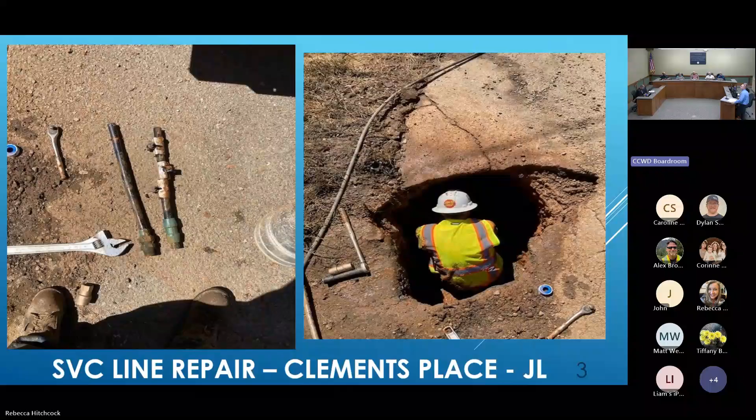So the guys, when they find stuff like this, they just go ahead and replace that section. You can see what they cut out in the image on the left. They actually cut out at the tap too - it was leaking at the tap. So they put a whole new tap saddle on and then ran a new section of poly tube.

So that's what a new tap saddle looks like - you can see it on the main, the AC main there at the top of the screen. And this is kind of what the old tap looked like - it's just threaded right into that old AC pipe. A lot of the time the threads, and any of the epoxy around the threads, will break.

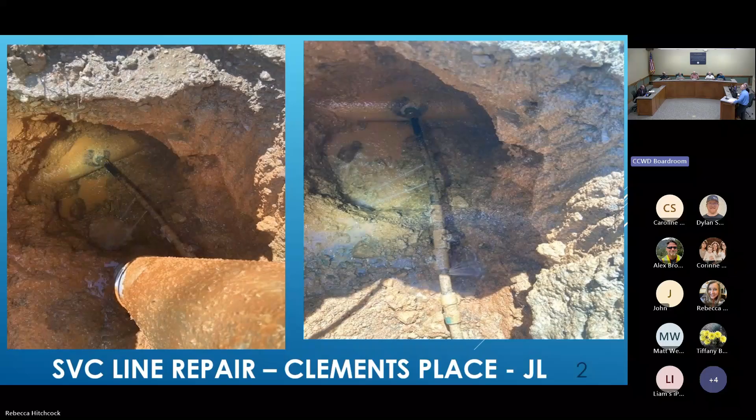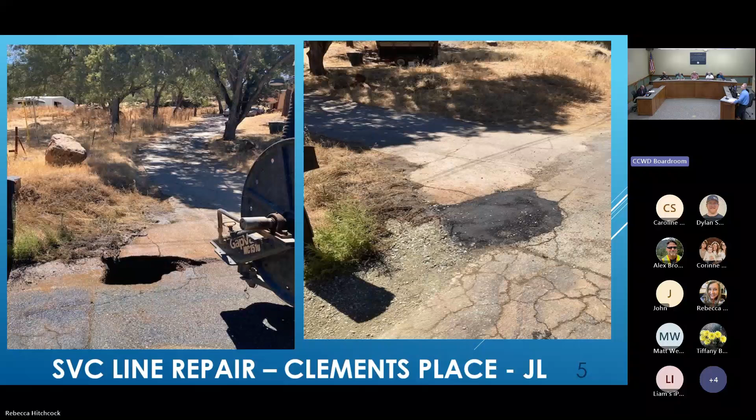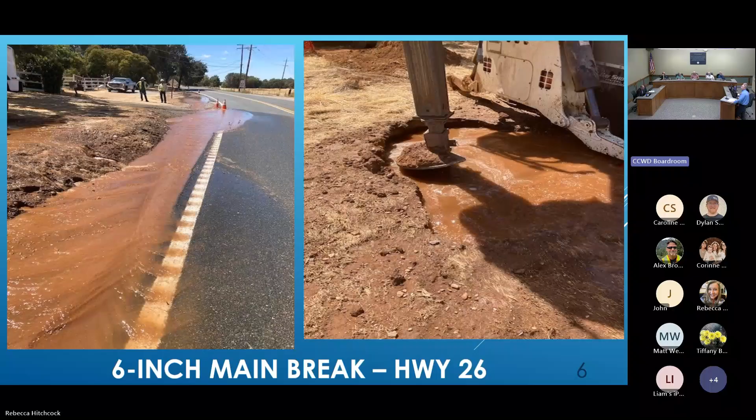This was a USA related to PG&E setting power poles off of Highway 26. Not a lot of water, but there's some. So this auger bit bored into our 6-inch water main. The challenge here is, when our folks respond, not to just completely shut that off and allow all that muddy water to flow back into the system.

You really want to keep positive pressure until you can clean and expose the area and then get in there and make a repair. So do you shut the water down a little bit? Yeah - so the hole where they bore, you just have that kind of boiling out.

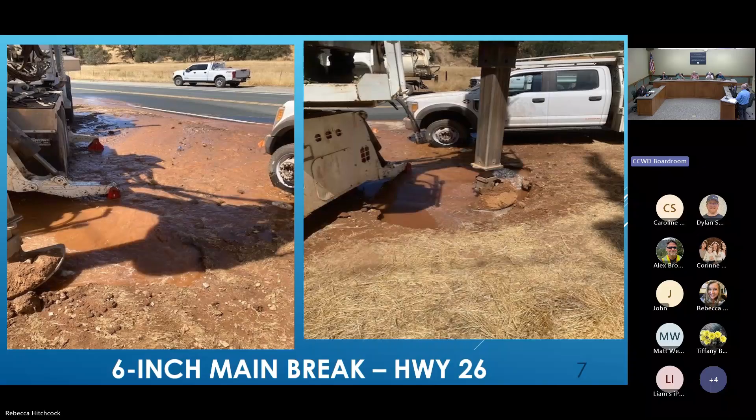So why would they be drilling anywhere near it? We've got good maps, they've got metal detection... We don't have good maps. Yeah, we don't. That's the challenge - it all depends on the location. It could be the map, it could be a locate bust. This pipe can be very difficult to locate.

This is asbestos cement - if it doesn't have a wire on it... Was that one of the 400 USA finds that we did? That would be, so I believe this is one. I'm not sure if this was a USA locate bust on our end, but there's a lot of back and forth between PG&E and the utilities.

If we mismark and tell them there's nothing right there, go ahead and dig, and they hit it, it's on us to repair it. If we mark it and they hit it anyway, then it's on them - so there's a little bit of back and forth that goes on there. PG&E usually has a minder on the job to help account for this work, and the ops folks here are up to speed on what happens. But there's so much work going on that invariably CCWD comes out ahead at the end of the month.

But at the end of the day, can you still see those marks? It depends, unless they took the asphalt out and it's just gone. Some of those USAs are what we call remarks, where we need them to come back because we've done a bunch of work and now we don't know where anything is anymore. Can you come back and mark it again? So that'll happen.

Damon, I have a question. You call that a concrete pipe, is that what most people would refer to as transite? Yeah, I believe AC, some folks call that transite. But how widespread is that material used? I'd say about 75-80% of our systems are this pipe, AC transite, throughout the county. The rest, about 20 to 25%, would be C900 plastic, PVC, ductile iron, some steel, though not a lot of that left anymore.

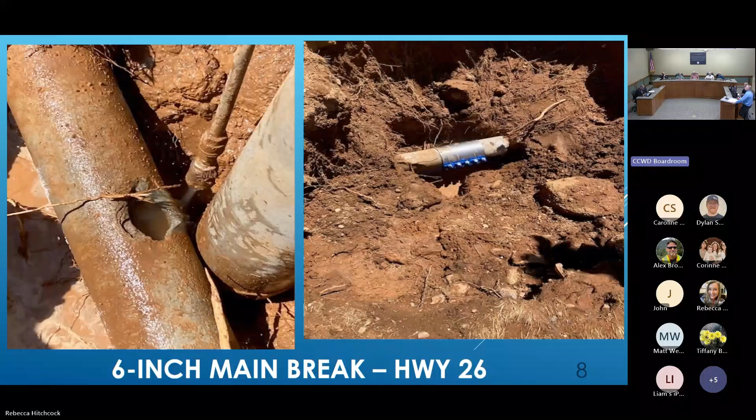So we have an earthquake here, is that stuff likely to crack and rupture in multiple places? Excellent question. I can show you, even not from an earthquake, when the soil changes, like expansion and contraction, when the humidity or water content in the soil changes. Usually we see this in springtime or fall. We'll get on AC pipe what's called a shear break, where the ground shifts and it cracks perfectly around the pipe, like a perfect circle. It's a quick repair, but we usually see that when soil conditions change. So if you imagine an earthquake of some magnitude, yeah, we'd have a lot of breaks for sure.

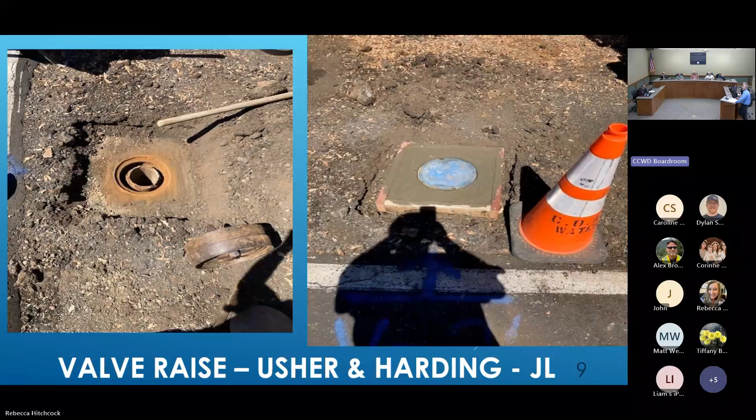Valve raise, we talk about this monthly. It's always a good idea when you find a buried valve to bring it up to grade. Kind of like part of the conversation Kevin was talking about with paving, it's always a challenge when it comes to paving if we're not on the ball locating our valves, and there's not a conversation about who's got the grade rings and who's got the valve lid. Maybe we'll run into that situation where they can be buried.

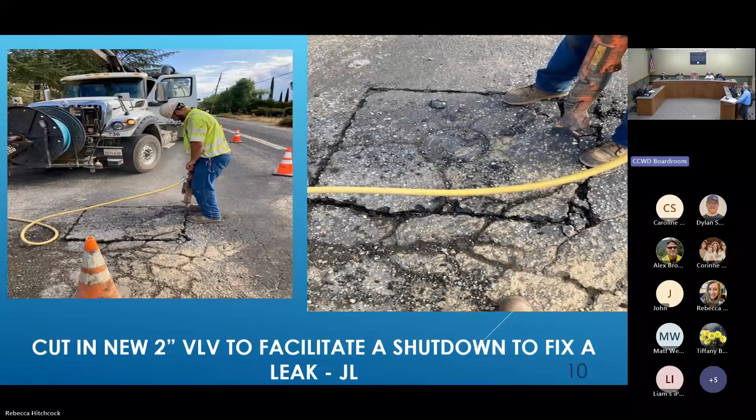This is an interesting one. We had to cut in and replace a valve so we could shut a water line off to fix a leak. So here folks are cutting into the asphalt. You can see, if there was a USA here, how, and that asphalt is in really good condition - I'm kidding - but you know, it could just disappear after the work takes place, and you have to get in there and redo the USA marks.

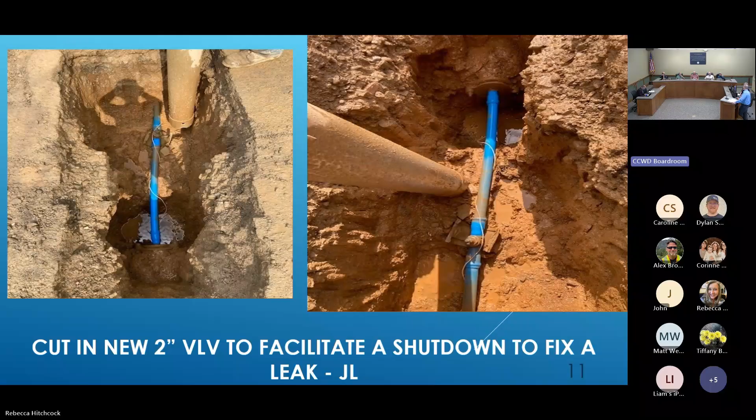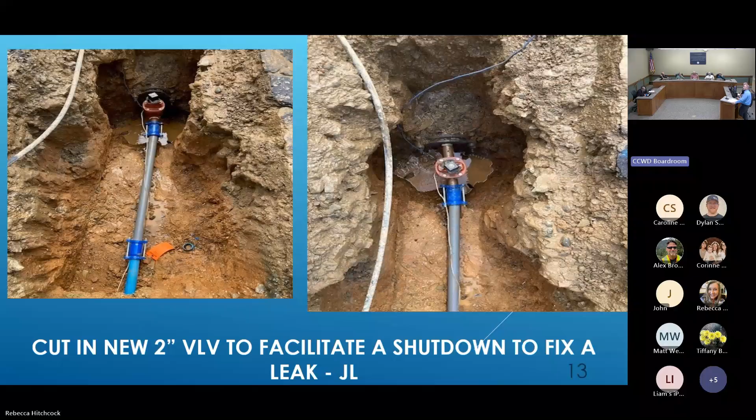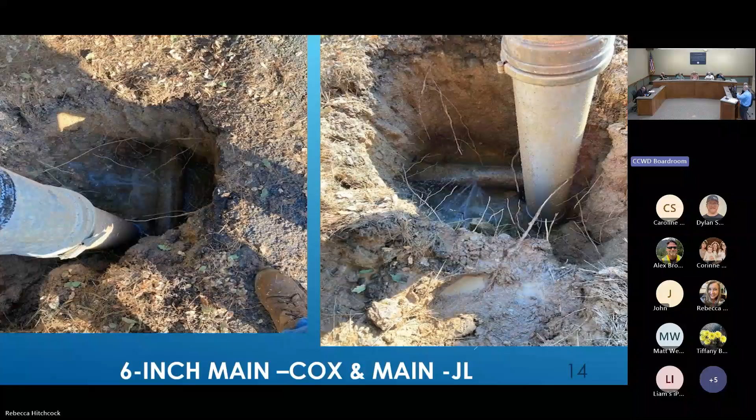So this is that shear break I was talking about. The soil just changed here, and that pipe broke. In the image on the right, you can kind of see water spraying out, just like this perfect circle around the pipe. Usually those are repaired with a full circle clamp.

This is an interesting one, a hand dig repair on a service line going up a hill. It's kind of hard to see in the image on the left, but our operator is laying down on the embankment, pulling out old sacks of concrete that were placed on top of the service line to keep it stable, so we could get in there and replace the service. So that's what you see, the old sacks of concrete laying at the base of the hill there, so he can make the repair.

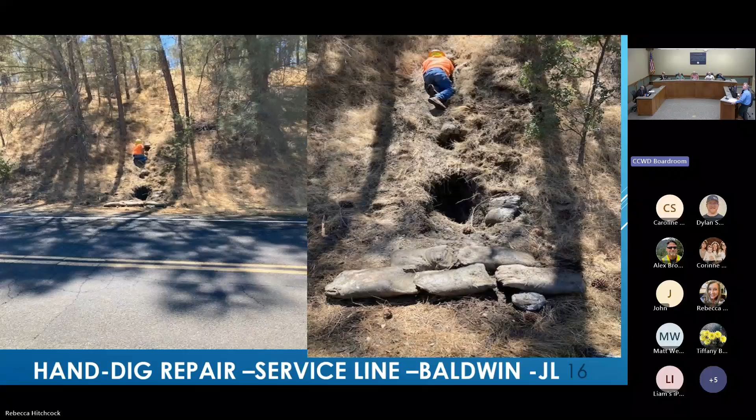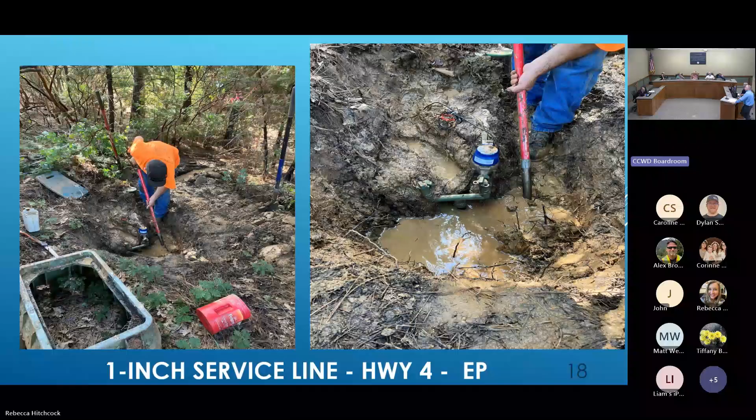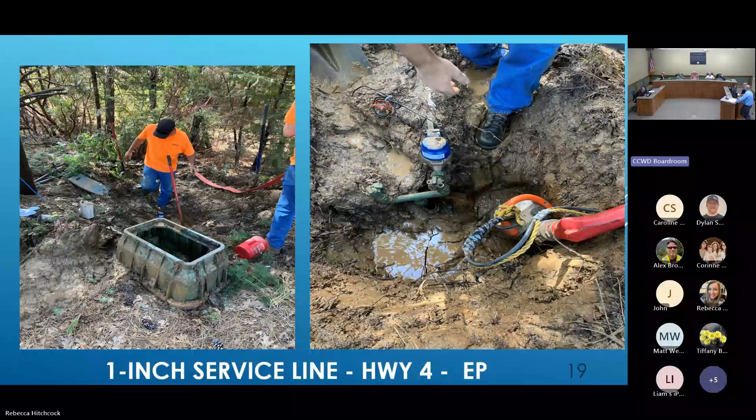So this is a 1 inch service line repair. This gives you a kind of window into how a lot of our services are plumbed. One service lateral coming from the main, feeding a manifold that feeds 2 water meters. You can see that in the image on the right. Then one of these sprung a leak on the bottom of what's called the curb stop. So folks get in there, tear everything out, fix what has to be fixed, and then put everything back.

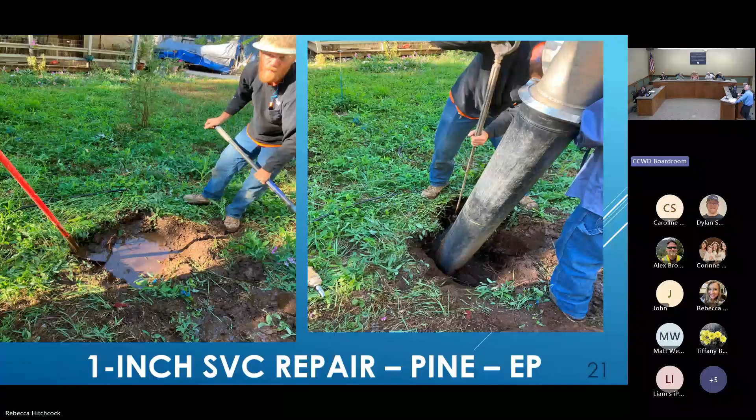Here's another 1 inch service. Just a pretty straightforward full circle clamp repair on this 1 inch service up on Ebbetts Pass.

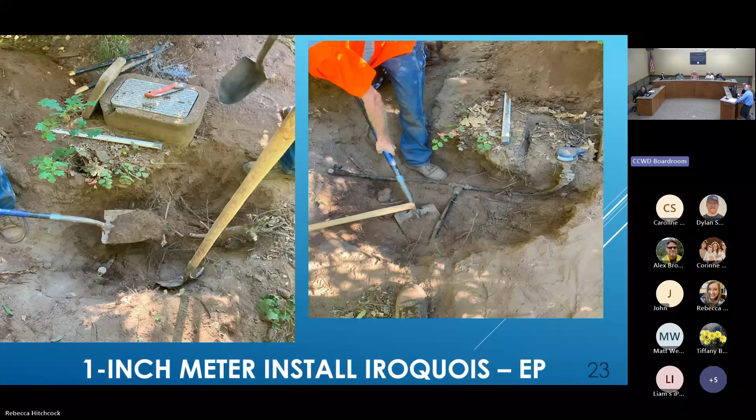Here's a 1 inch meter install. Here you go, you got another different manifold. This one is actually just a poly tube and a T. So the image on the right has 2 lines going to 2 meter boxes and 2 water meters. Then our folks will get in there and set the meters, clean it all, and make it nice, landscaped if you will.

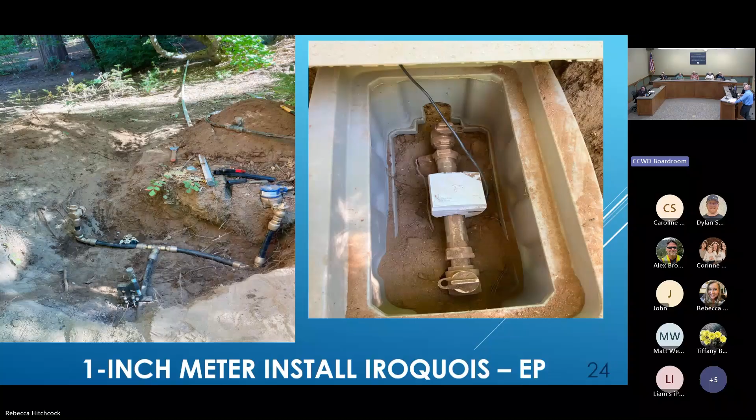And so that's the end result, the image on the right.

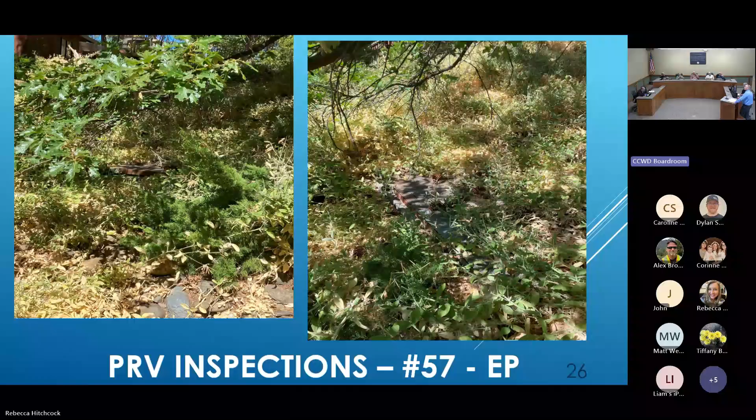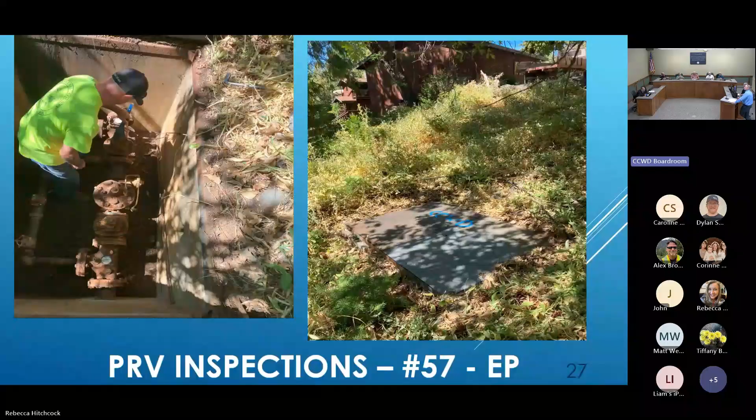PRV inspections. We talked about how variable the pressure is up on Ebbetts Pass, and the number of pressure reducing valves we have is in the hundreds. This one, as you can see in this image, it's kind of hard to see on the left, but it's pretty old. These are the kind of PRVs we're hoping we can replace, ideally with some of the grant funds from the AMI project, to get up there and optimize the pressure throughout all the systems, which results in a reduction in energy use and more accurate water supply to meters. So folks get in there and do maintenance on these PRVs. It's critical - if they fail and you send high pressure to the community or residents, it can result in a lot of issues for the homeowner.

Interestingly, this past month of August there was a lot of use on the slurry line. Two customers were using a heck of a lot of water, and they were noticing water quality issues - we'd get a lot of turbid water and the pressure would fluctuate. We went out and investigated, and the water coming in from the canal was great. We have a pressure reducing station on that pipeline, and there were no issues there. We're pretty confident that the amount of draw they were taking at any point, they were actually almost kind of fighting each other, so it's something we'll need to pay attention to in the future. They each have 1 and a half inch connections and are some distance from each other, but the speed at which they pull water affects the speed at which that pressure reducing valve operates, and can allow that water line to somewhat fluctuate. So dirt can become stirred up in the bottom of the pipe, and they can pull it into their water trucks.

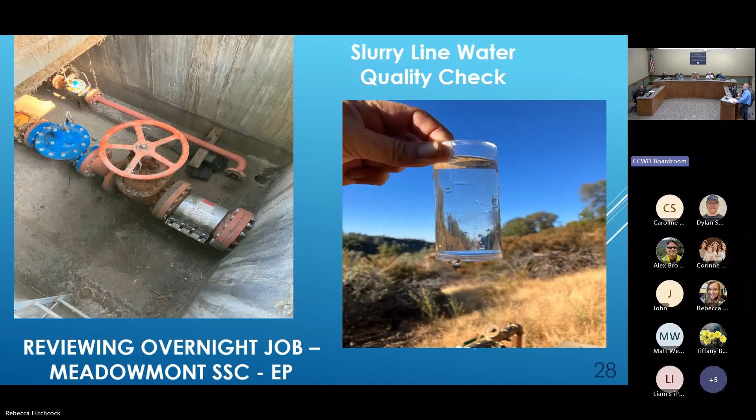As you guys know, when you're in the ground or when you have to deal with gas, you're going to see the metal behave differently. I have some pictures of that here in an upcoming work order slide.

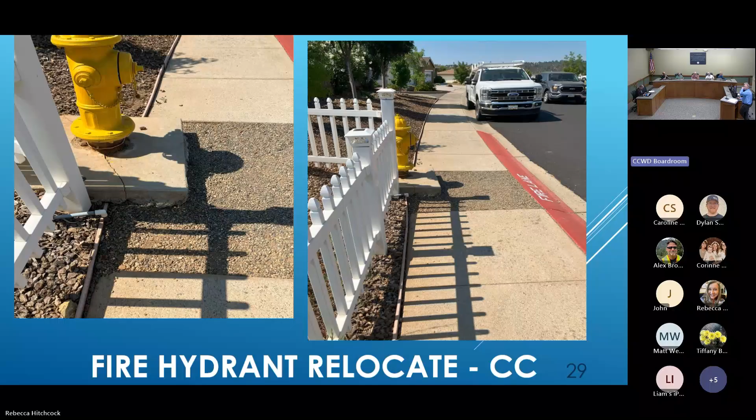Our guys identified this, worked with, I believe this was Copper Cove HOA. Worked with the HOA, the property owner that owns that white fence was great to work with because there needed to be a little bit of relocation. Our construction crew came in, broke that up, and poured the rest of the sidewalk, pushed the fire hydrant up onto the embankment a little bit. Fire department still has access, can get right up to that fire hydrant, and the fence was moved a little bit. So just improving the system in general for everybody.

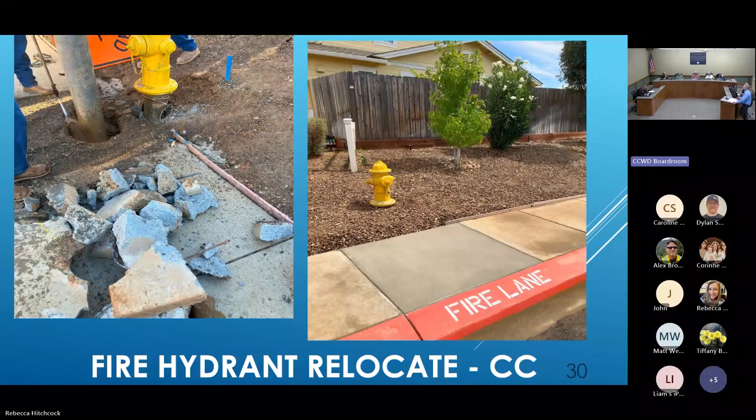This just aesthetically looks way better. There's still fire access, and everybody's happy. So this was a great one. Pretty straightforward. This is interesting.

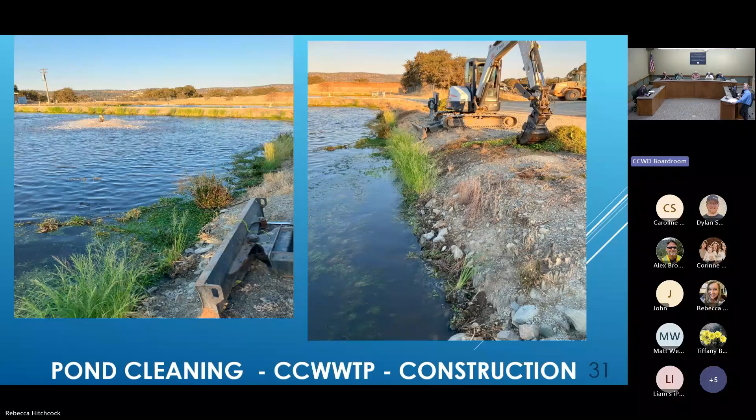Construction crew worked in Copper to remove a bunch of plant matter that just grows around the sewer ponds. So this is housekeeping. The treatment operators really want to keep sewer ponds as clean as possible, so they'll work with a construction crew and bring out equipment like the mini excavator and haul all that off. Ultimately the ponds end up looking like ponds in the park, which is what you want them to look like, really sanitary. So hats off to the guys doing that work.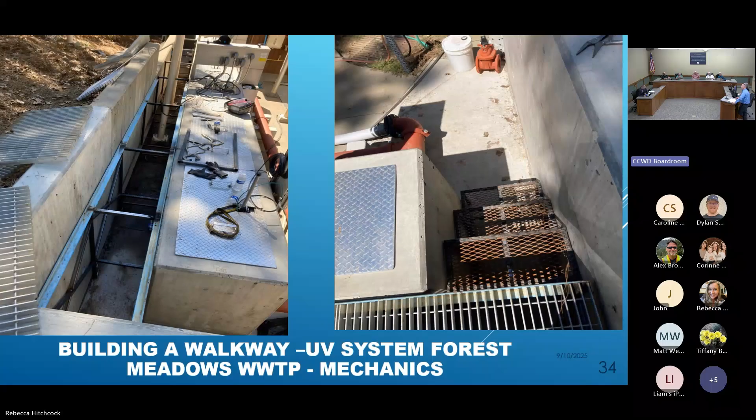In the image on the right, you can now push a crane across the top of that and pull the bulbs up, use a hoist, do your work, and you're kind of at ground level with everything.

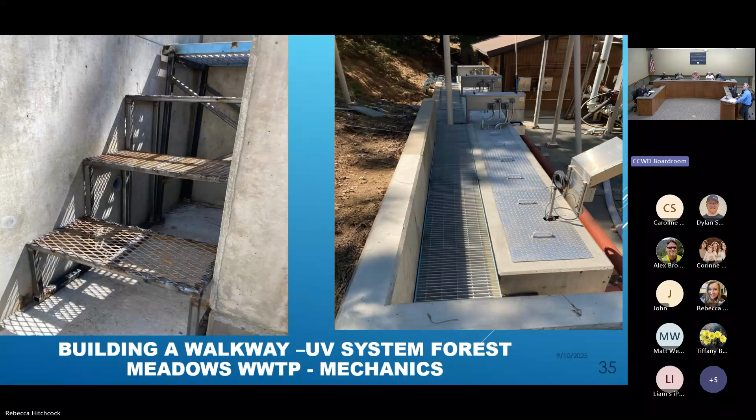Kind of subtle, but a couple things will tell you that this is emergency sewer main repair. Can you guys tell me how you would know that this was a sewer main leak?

This is Vallecito. Vallecito, the sewer lines are all over the map. You can see that in the image on the right. It's pretty much been blasted by an auger from PG&E trying to get in there and put that.

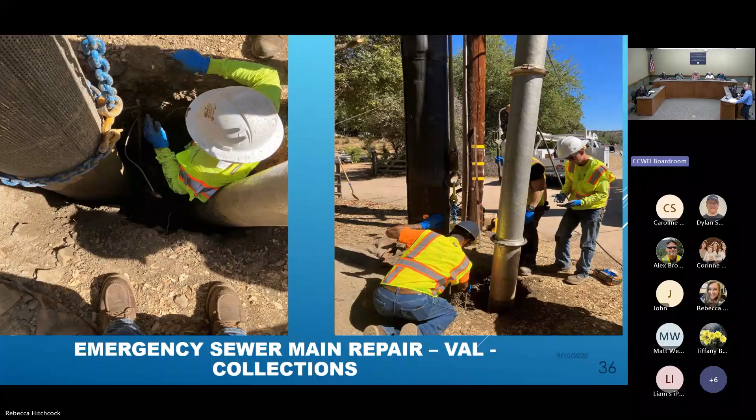And this is how close we were to that pole. They just set that pole. Wow, look, the image on the left - there's the pole, the chain's still on it. So those guys are moving fast. Hats off to the county for working close to those guys. John is a busy man over there.

This is our Acorn pump station. You guys may have heard of the Acorn pump station. This is the secondary pump from the middle fork of the Mokelumne River pump station - our secondary source of supply for the West Point water treatment plant. CPUD's water, that's correct. This pump station is on the Calaveras Band of Miwok Native Americans proper. This boosts the pressure and allows this water to get all the way to the plant or to the Bummerville Reservoir, either or. So when the plant shuts off, these pumps still operate and push water to the reservoir. When the plant kicks on, it'll draw from the reservoir or draw from the line, depending hydraulically on how it works.

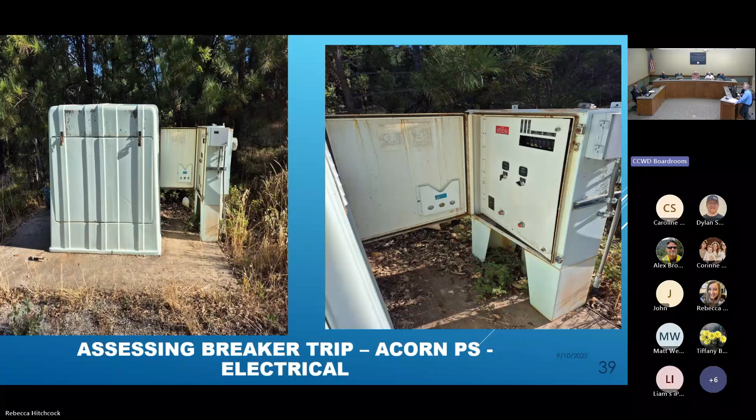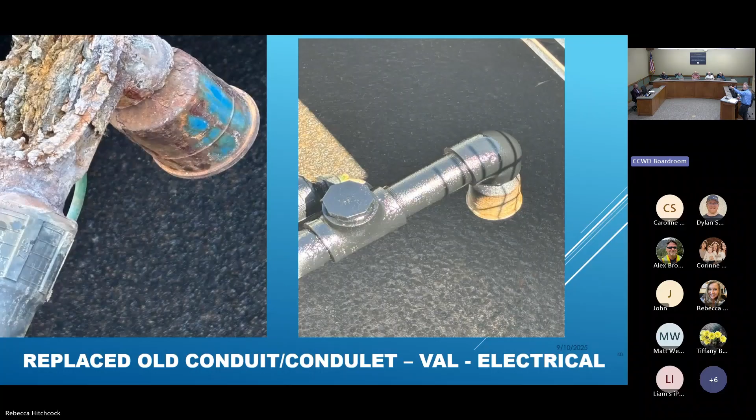This was something I wanted to highlight - what gases can do to piping. In the image on the left, that's an electrical conduit holding a float over the equalization basin at Vallecito. Right over those brown tanks is a big 26,000 gallon basin in the ground. You can walk on the lid and it's full of pumps that push the liquid sewage into the membrane bioreactor plant. The hydrogen sulfide and other gases just eat that metal away - so that conduit on the right, what kind of metal? It looks like a piece of galvanized tied into some plastic in the image on the left, but in the image on the right, that's elastomeric coated steel. That's the most robust type of conduit you can get these days. As long as you don't nick that coating and keep those threads covered, you shouldn't experience corrosion at the frequency - it should last for years and years compared to what happened.

And we're getting close to wrapping that project up. Right? We're getting really close to wrapping the project up. Yeah, nice.

SCADA system repair - the SCADA system is the interface between the treatment facility and the operator, and those computers have to work. Our instrumentation electrical techs are very adept at making sure they stay online and continue to work. This is a battery replacement - they can pull basically the motherboard out, put whatever it is they need to replace into it, put it back on, kick it on, and you can interact with the treatment facility again.

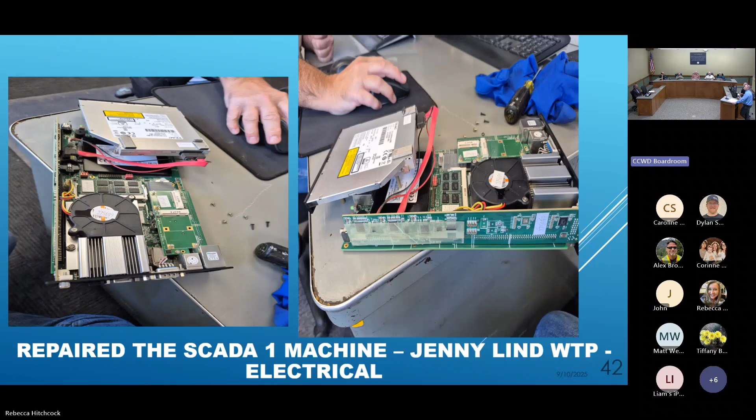So what redundancy do you have there? Do you have a backup? SCADA 2, yep, and then there's backups that happen on site, historian backups. So there's 2 machines, 2 systems, and then a backup that's backed up, so to speak. And just so everybody knows, they're disconnected from the internet - these SCADA machines are not connected to the internet, they're connected to the treatment facility.

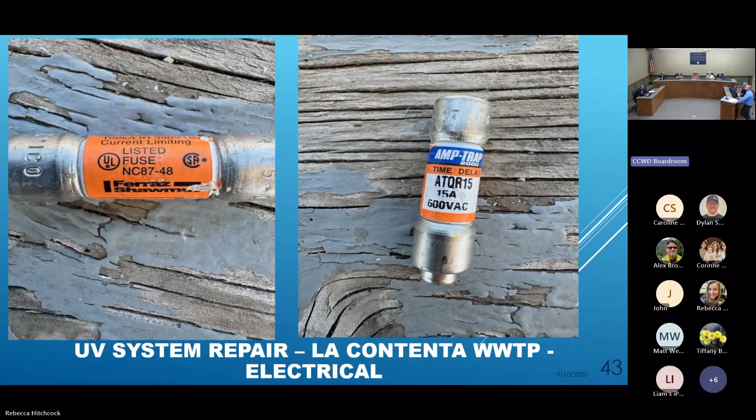UV system repair and La Contenta. So it can be as basic as a fuse, which there were fuses that need to be replaced. It could also be as robust as basically the PLC essentially.

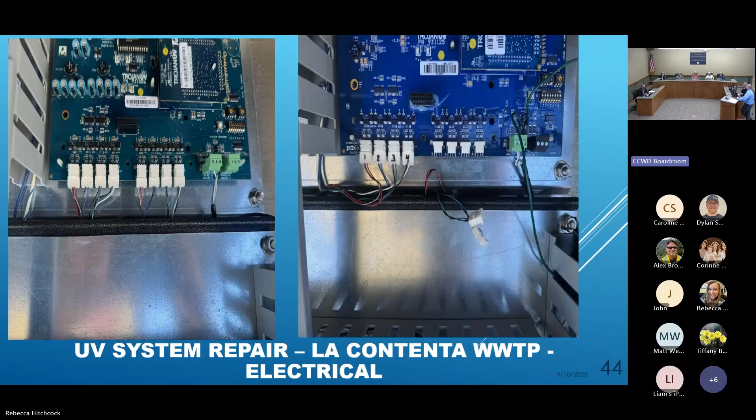So our folks keep some of this stuff on hand. The electricians have a lot of backup equipment, just in case equipment, particularly equipment that has a long lead time. They will hold on to a couple just in case. So sometimes when you look at the claim summary you'll see sewer floats, and they're going to buy 25 sewer floats because sewer floats have a lifespan. Or you might see Monocon, or an HMI, a human machine interface. They're always going to have something in the back pocket so that at 2 o'clock in the morning you can keep the plant running.

And then I just wanted to touch upon what CCWD experienced last Tuesday morning. It started in the morning with the fires, the TCU Lightning Complex fires. It was interesting, it was like 4:30 or 5 in the morning.

And it was summertime, so my wife thought she heard an explosion in downtown Jackson. We were like, what is going on, what is that? And then we realized, oh, that's thunder. And then sure enough, as I'm driving in, the phone starts ringing, fires in people's backyards. So it was, as you guys know, really moving and shaking.

And basically just kind of a fly on the wall conversation about where they felt the fire was moving. As you guys know, with the Watch Duty app, it's an essential game changer. When we can pull up real time weather, which is huge for us because then we don't have to get into the Emergency Operations Center's hair at OES and ask has the weather turned. We can see what's going on. So that was really helpful for us, for CCWD in particular.